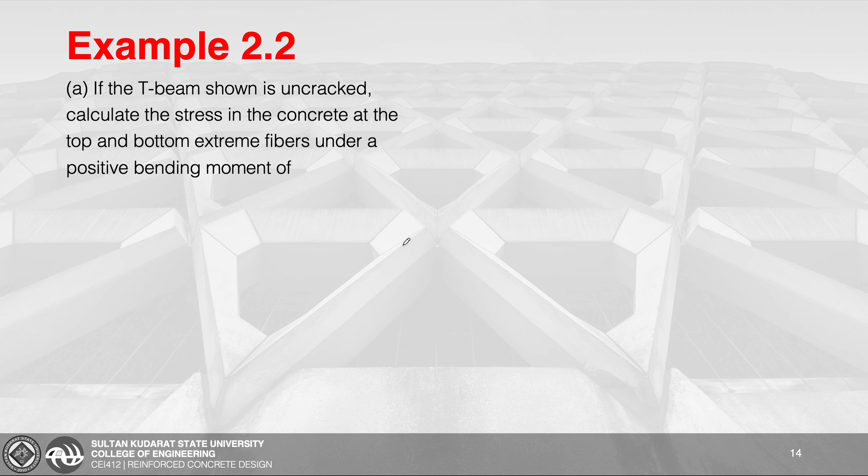Example 2.2: if the T-beam shown is uncracked, calculate the stress in the concrete at the top and bottom extreme fibers under a positive bending moment of M equivalent to 108.47 kilonewton meter.

In letter B, if Fc prime is equivalent to 20.7 megapascal and normal weight concrete is used, what is the maximum uniformly distributed load that the beam can carry if used as a simple beam with L equivalent to 7.3 meters span, without exceeding the modulus of rupture of the concrete?

Letter C: we're going to repeat part B if the beam is inverted.

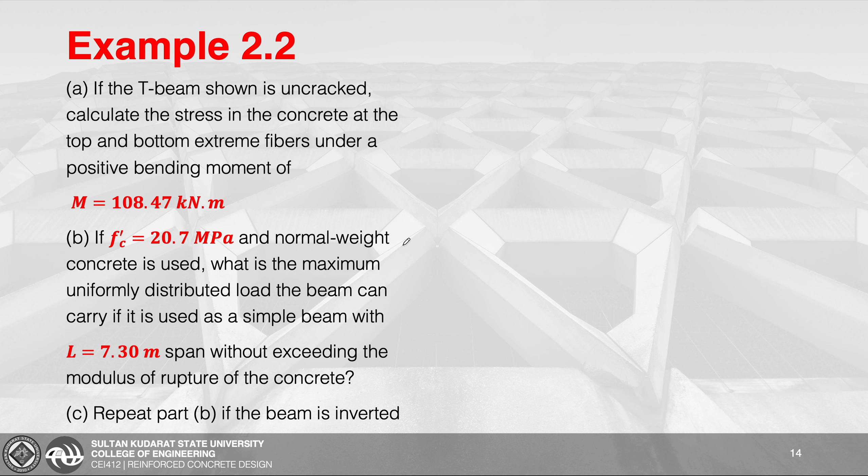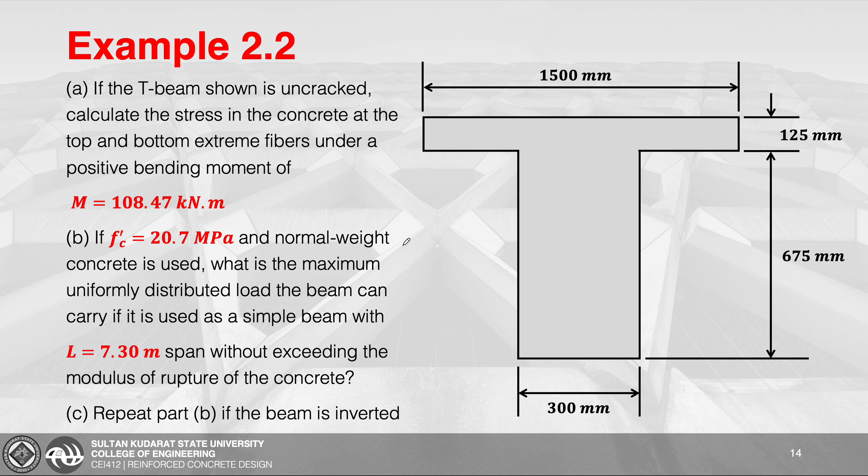So this is our section. We have here our T-beam. The flange width is 1,500 millimeters. The thickness of the web is 300 millimeters. The thickness of the flange is 125 millimeters, and the remaining distance for the web is 675 millimeters.

This is our solution. First, let's determine area 1. Area 1 is the section of our flange. So area 1 is equivalent to 1,500 times 125, which equals this value.

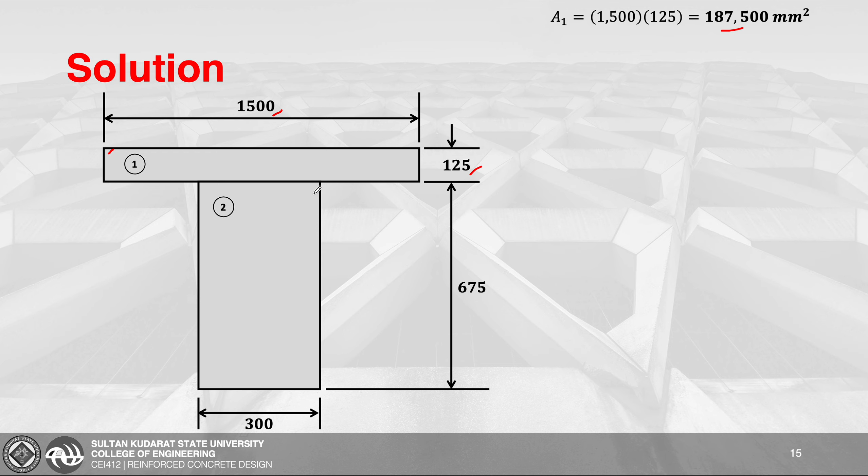Next is the area of our web. So area sub 2 is equivalent to 300 times 675, which equals this value. Next, let's solve for the total area by adding area 1 and area 2. This is now equivalent to 390,000 square millimeters.

Next, we're going to determine the centroidal distance of area 1, which we'll call y sub 1, taken from the centroid to the reference line. So y sub 1 is just equivalent to half of 125, which is 62.5 millimeters.

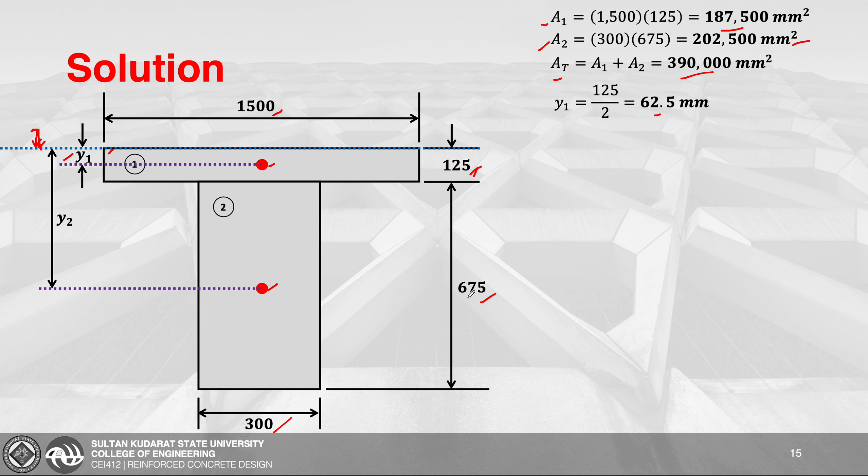After that, let's solve for the centroidal distance of area 2, taken from its centroid to our line of reference. To solve this, we take half of 675 and add it to 125. So 675 divided by 2 plus 125 gives us 462.5 millimeters.

After that, we're going to solve for the centroid of area 1 and area 2 using Varignon's theorem, where total area times the centroid equals the summation of Ai Yi. So Y is now equivalent to the summation of area I, Yi, all over the total area.

Also, Y top is equivalent to, since the Y's we considered, Y1 and Y2, are measured from the top, what we're solving for is the location of the centroid from the top. So this is equivalent to area 1 times Y1 plus area 2 times Y2, divided by the total area.

By direct substitution, area 1 is 187,500 times Y sub 1 of 62.5, plus area 2 of 202,500 times Y sub 2 of 462.5, all over the total area of 390,000. By direct substitution, we get Y top to be equivalent to 270.1923 millimeters.

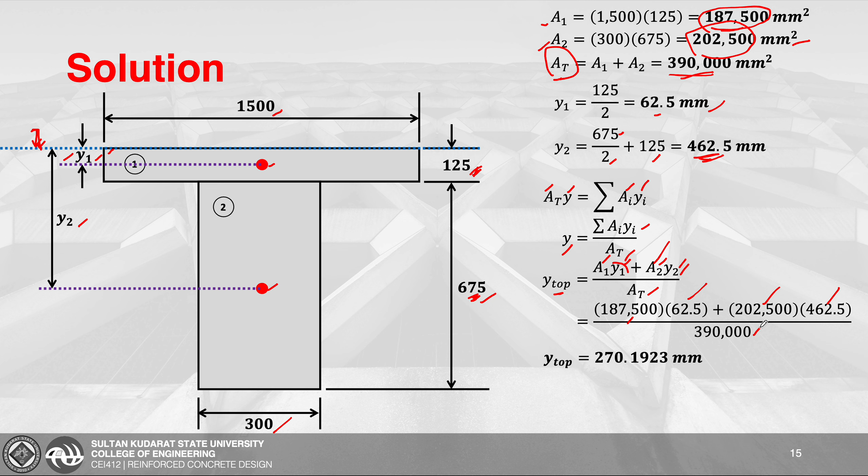So Y top is most probably located here, the projected location. That is the location of our Y top.

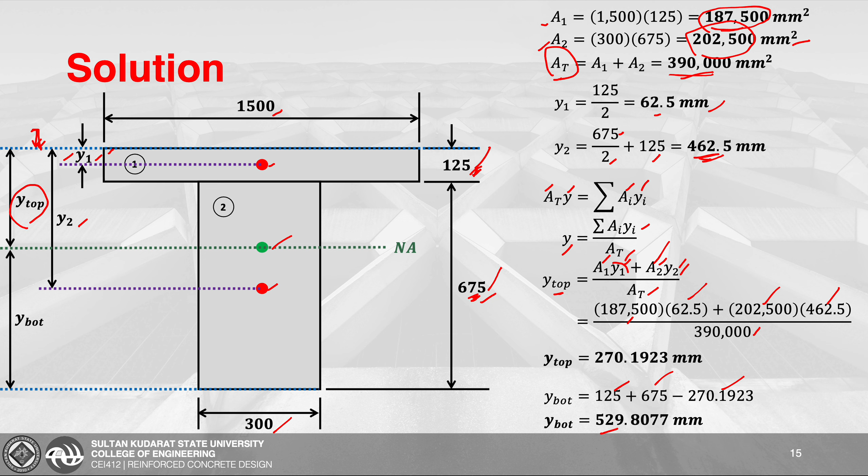To solve for Y bottom, we just add 675 and 125, then subtract Y top. So Y bottom is equivalent to 125 plus 675 minus Y top of 270.1923, giving us Y at the bottom equivalent to 529.8077 millimeters.

Take note, Y bottom is the Y on the tension side. After that, we're going to solve for the transformed moment of inertia.

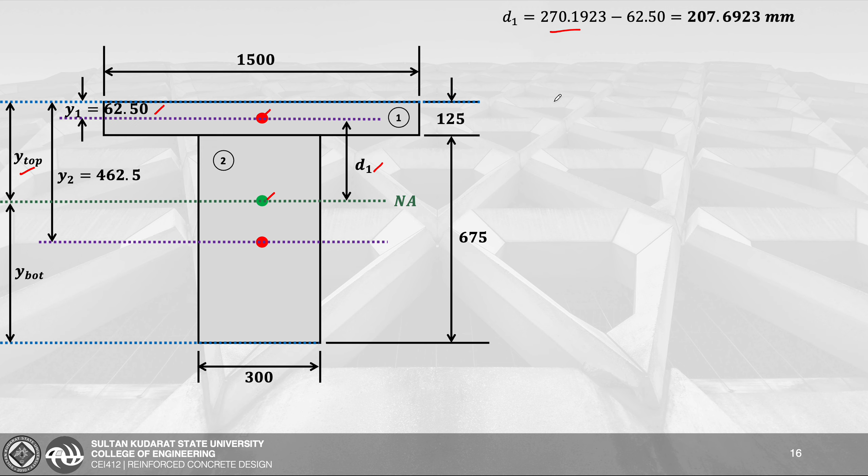First, let's solve D1, located from the centroid of area 1 to our neutral axis. To solve this, we subtract y sub 1 from y top. So Y top is 270.1923, minus Y1 of 62.5, giving us this value.

After that is D sub 2, located from the centroid of area 2 to the neutral axis. We subtract Y top from Y sub 2. So D sub 2 is equivalent to Y2 of 462.5, minus Y top of 270.192, giving us this value.

After solving for that, we use the equation for transfer moment of inertia: I sub NA is equivalent to the summation of IX plus AD squared.

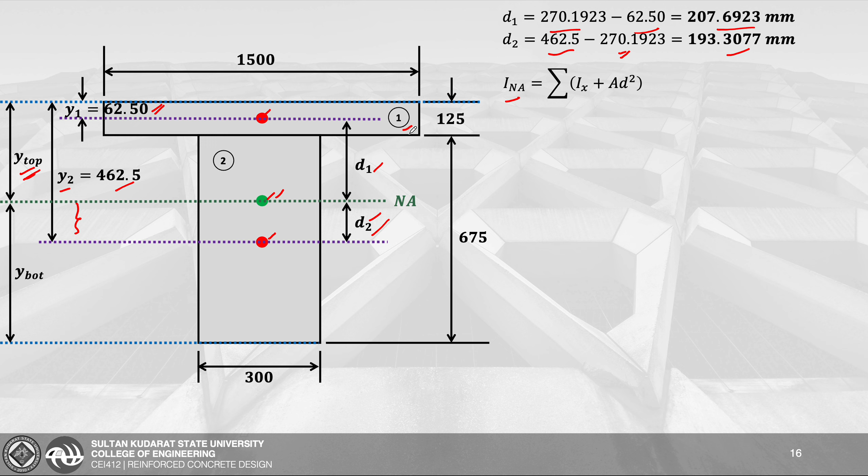First, let's focus on the shape of area 1, which is rectangular, so we use BH cubed all over 12. Our B is 1,500, the height is 125, cubed, divided by 12, plus the area, which is 1,500 times 125, times D, which is D1 equivalent to 207.6923, squared.

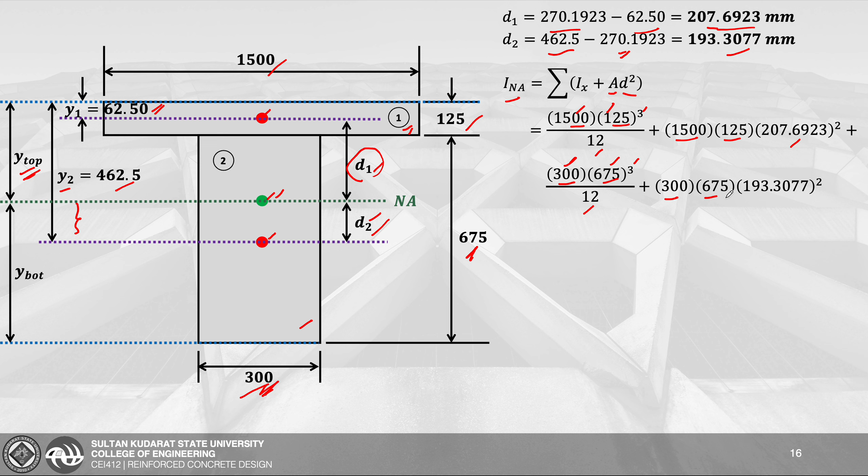After that, we add next the area 2 moment of inertia, so BH cubed all over 12 again. Our B here is 300, the height is 675, cubed, divided by 12, plus the area of 300 times 675, times D sub 2, which is 193.3077, then squared.

So yung moment of inertia natin dito about the neutral axis is now equivalent to 23,587.8227 times 10 to the power of 6 millimeters to the 4th power.

After that, masasolve na natin yung extreme stresses natin sa compression na side. This is equivalent to M times C top all over our I. So yung M natin times yung C top natin is equivalent to Y top, kasi ito yung nasa compression na side, divided by our moment of inertia about the neutral axis.

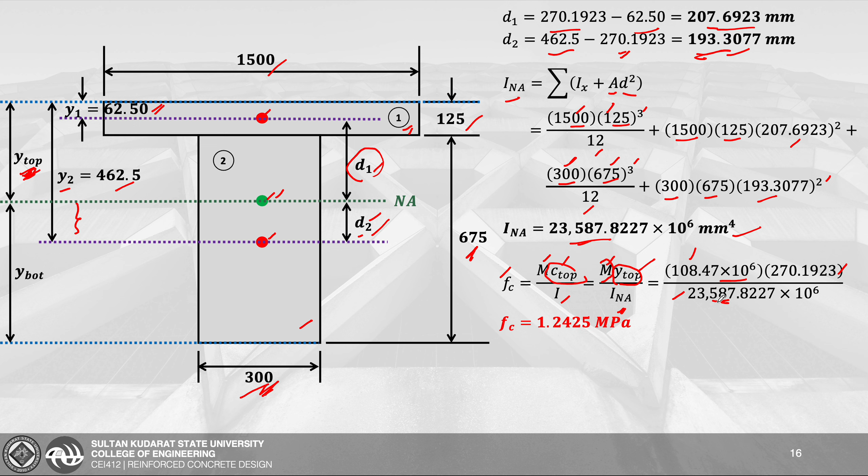So yung given na moment natin based sa problem is 108.47. Since naka-kilonewton meter siya, we still have to convert it to Newton millimeter, kaya mag-multiply tayo ng times 10 to the power of 6. Yung Y top, i-direct substitute na lang natin, that is equivalent to 270.1923. Then we're just going to divide it by the moment of inertia about the neutral axis. So masosolve natin ito na value for our stress ng ating concrete sa compression na side is 1.2425 megapascals.

Next naman is yung extreme na stress ng ating concrete sa tension na side. This is equivalent to MC bottom all over I, in which yung C bottom natin, that is also equivalent to Y bottom. So the same lang talaga yung computation, yung change lang dito is yung Y. So instead of using Y top, yung Y bottom na naman yung gagamitin natin, kasi ito yung distance sa tension side natin. So yung Y bottom natin is 529.8077. If we're going to direct substitute the other values, you'll get a value here of 2.4364 megapascal.

So after that, solve natin yung modulus of rupture. Since normal weight yung concrete natin, yung lambda natin is equivalent to 1. Ito yung modulus of rupture na formula. So by direct substituting the lambda na 1 tsaka yung Fc prime na 20.7, we'll get our F sub r or modulus of rupture to be equivalent to 2.8208.

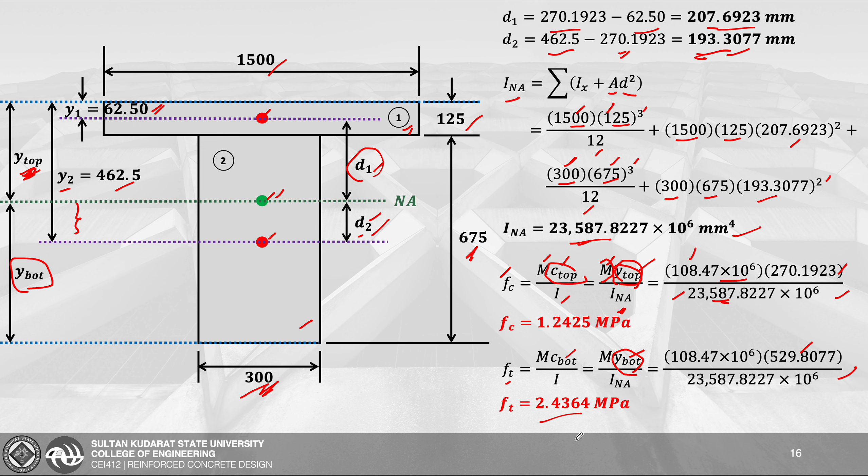Now, compare natin kung crack ba, i-evaluate natin kung crack ba or uncrack ba yung section. I-compare natin yung FR doon sa ating F sub T. Let's try, yung F sub T natin is 2.43, pero yung FR natin is 2.82. So, since hindi lumampas yung bending stress natin sa ating FR, meaning, this is still an example of an uncracked na section.

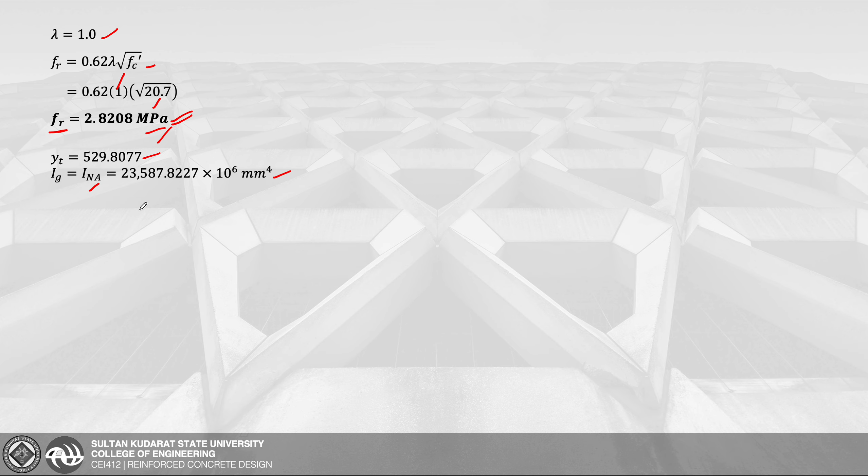After that, solve naman natin yung MCR or cracking moment. So, first, yung Y sub T, this is equivalent to 529.8077. Then, yung gross moment of inertia natin, this is equivalent to the moment of inertia about the neutral axis, as is yung ating value dyan. So, by direct substitution, yung FR natin na 2.8208, tsaka yung IG, tsaka yung Y sub T.

Makukuha natin na value dito, take note, naka Newton millimeter, kaya mahaba yung values. So, para ma-convert natin yung value from Newton millimeter into kilonewton meter, we still have to divide this computation sa times 10 to the power of 6 to get this value naman na 125.5862 para sa ating cracking moment.

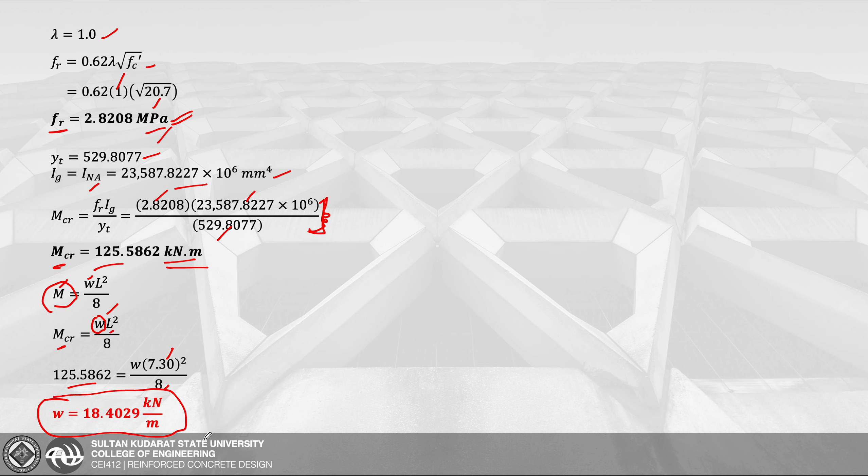So after that, para ma-solve natin yung uniformly distributed load with which hindi pa mag-crack yung ating section. So since simply supported yung ating beam, we have here our derived equation for the maximum moment sa ating simply supported beam, M is equivalent to WL squared all over 8. So yung gagamitin natin dito na moment must be the cracking moment. So by direct substituting it, we have here 125.5862 is now equivalent to our W times yung length natin na given sa problem, which is 7.3 squared divided by 8. So yung ma-compute natin ngayon na uniformly distributed load is 18.4029 kilonewton per meter. So meaning, ito yung load for which ma-achieve ng ating concrete yung modulus of rupture nito, tsaka yung cracking moment.

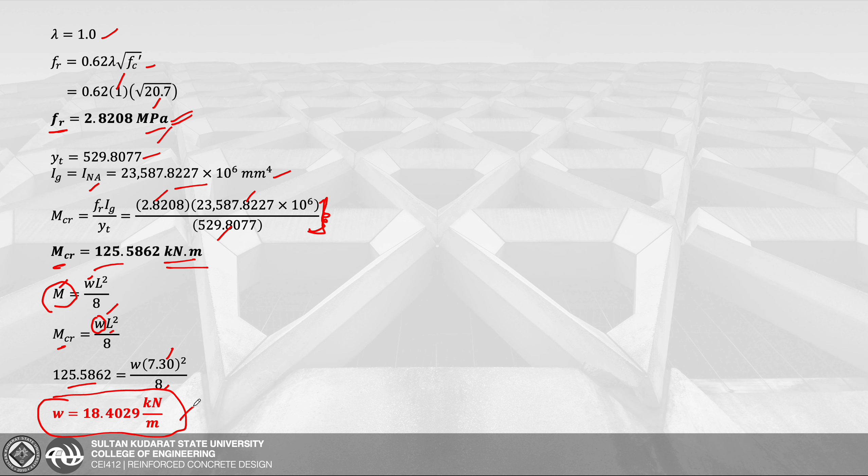Next naman, paano kung inverted yung ating section? So, paano kung inverted? So, if that is the case, yung location ng ating neutral axis dito hanggang dito sa flange natin, ito yung gagamitin natin sa ating computation.

If that is the case, yung Y sub T natin will now be equivalent to 270.1923. And if we're going to solve again for our MCR, na FR, IG all over YT, yung FR natin as is 2.8208, yung IG natin the same pa rin, pero yung YT natin dito is 270.1923.

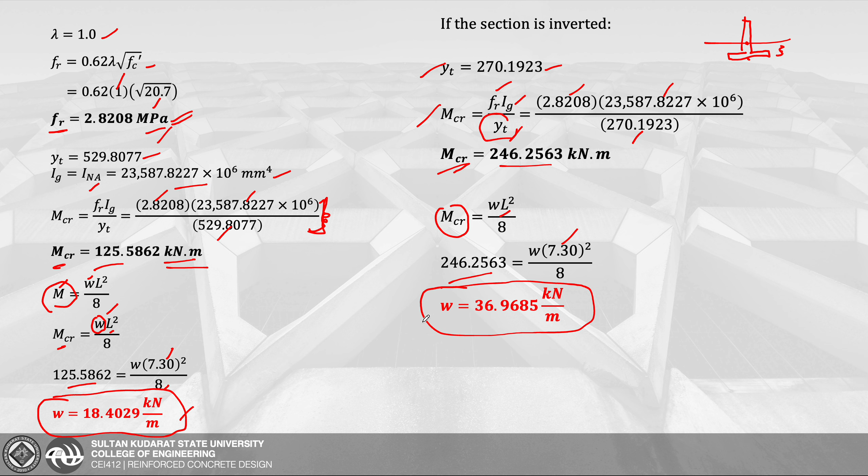Yung masasolve natin dito na cracking moment is 246.2563 kilonewton meter. After that, we're going to substitute it here sa formula ng ating maximum moment ng ating simply supported beam. MCR is equivalent to WL squared all over 8. Substitute lang, same pa rin yung length, 7.3. Yung masasolve natin dito na uniformly distributed load is 36.9685 kilonewton per meter.